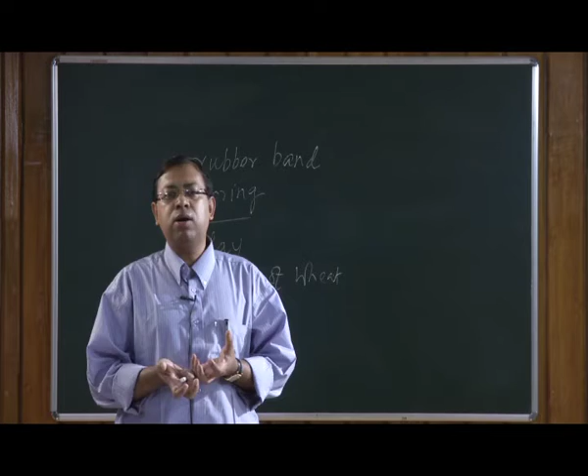So, what actually goes on inside the material for which some of these materials actually regain their original shape and some of them do not? To understand that, let us understand the intrinsic building block of these materials. And by building block, what we mean are the atoms and the molecules and the way they are bound to each other.

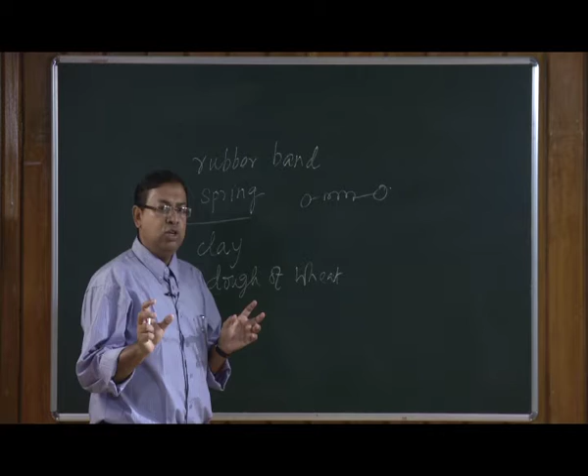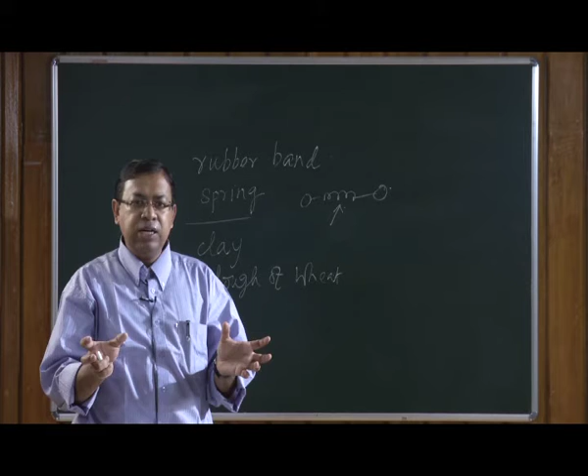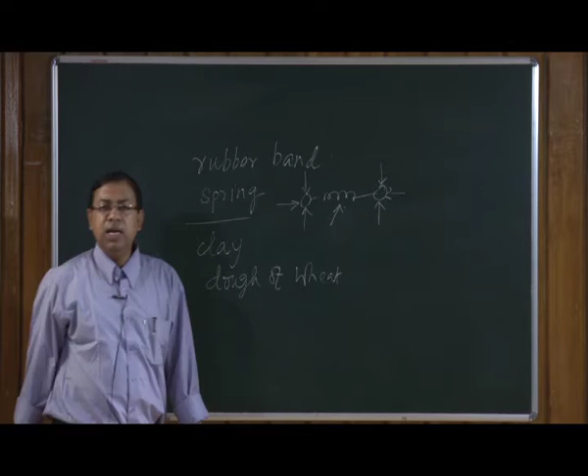It will be very preliminary to say that we could think of these elastic materials to be made of springs, where the two balls at the end that you see actually represent maybe atoms or molecules, and the spring-like thing that I have drawn here are the connections between them, and when a pressure is exerted on these materials either this way or even these ways, they tend to regain their original configuration.

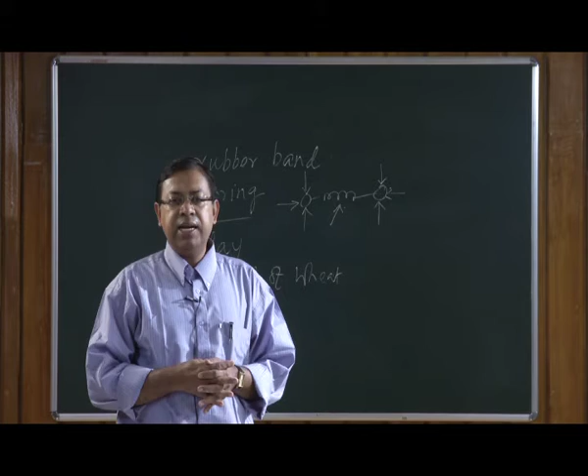So, having understood the atomic configurations which really render these elastic properties, let us try to understand the relationship between the forces and the elongations. There are terms such as tensile stress and tensile strength that we will come to very soon, and what are the interrelationships between them, and how do we actually quantify some relations by which elasticity can be understood better.

So, let us take an example of two rods, and consider three different cases. In the first, they have same initial length but different extension. And to make matters even clearer, let us call L0 the initial length, delta L the extension.

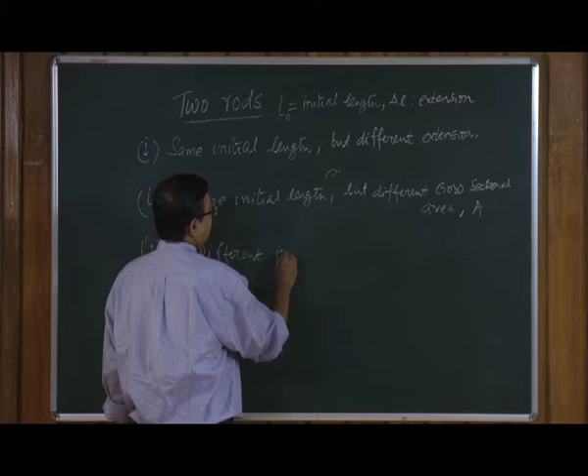So, case number 2, where we have same initial length, which is L0, but different cross sectional area. And in the third case, we have different initial length but same extension.

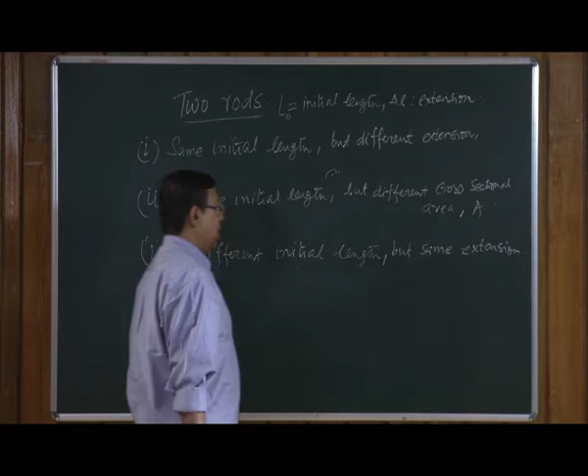Now, if I cause an extension and apply a larger force F1 here and a smaller force F2 here, I will have more extension in this rod than in this rod. Okay? So, where my F1 is greater than F2. So, this is case 1.

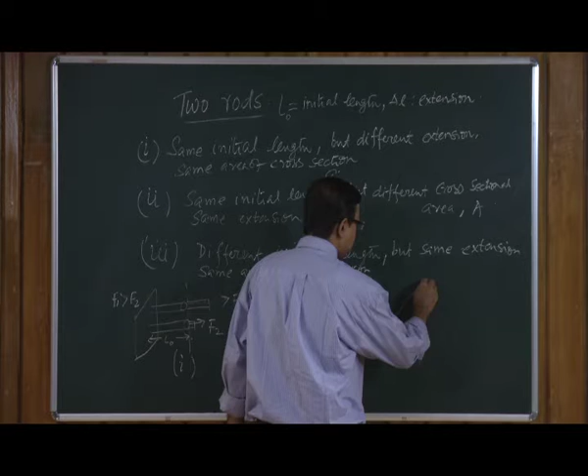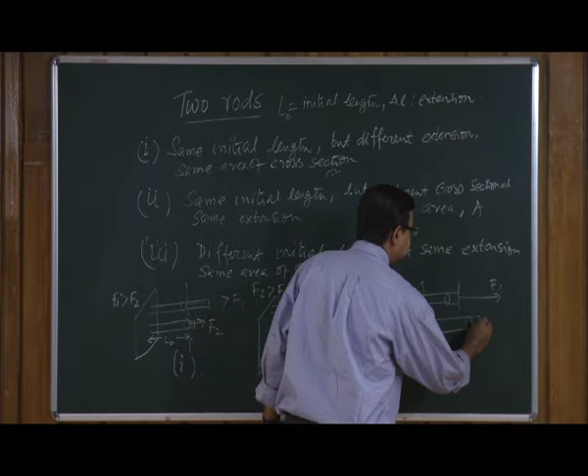Going to the third case, we have different initial lengths. Now, to have same extension, I need a bigger force in the rod with smaller length than for the rod with bigger length. So, this is your L01 and this is your L02. So, my F1 is greater than F2.

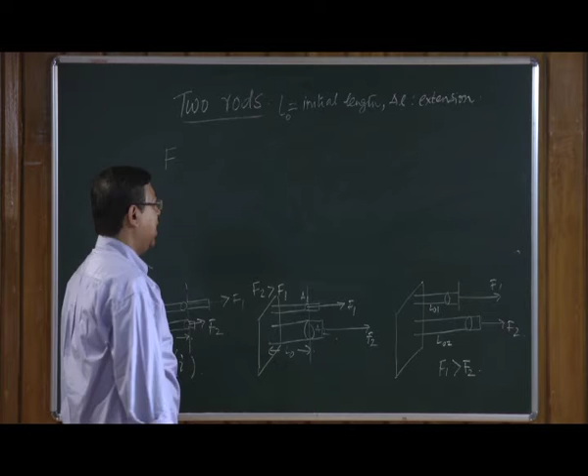So, from these three figures, it is apparent that the force required to create an extension delta L in a rod of initial length L0 and cross sectional area A: F is proportional to delta L, F is proportional to 1 over L0, and F is proportional to the area of cross section. So, if we combine all three of them, we can write that F is proportional to delta L, 1 over L0, and A.

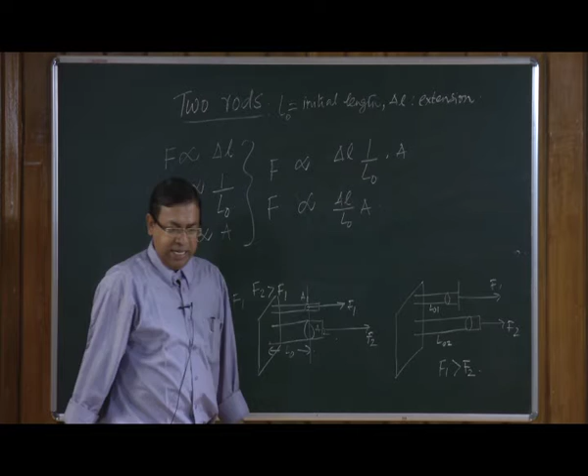So, I can write it a little more compactly, and so my F is proportional to delta L over L0 multiplied by the area of cross section. Now, delta L by L0 can be called the fractional change in length. Let us write delta L by L0 as the fractional change in length.

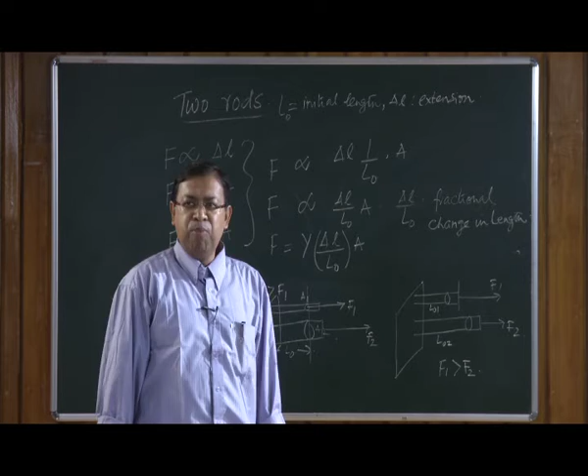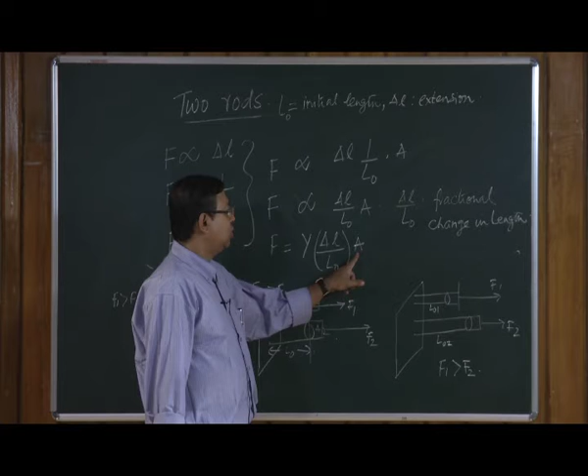And hence, I can change this proportionality using a proportionality constant, Y, so F is equal to Y times delta L by L0 into A. This is a very important equation in the study of the elastic properties of solids, which says that the force required to create an extension delta L for a material of length L0 and cross sectional area A is written as this, where Y is known as Young's modulus.

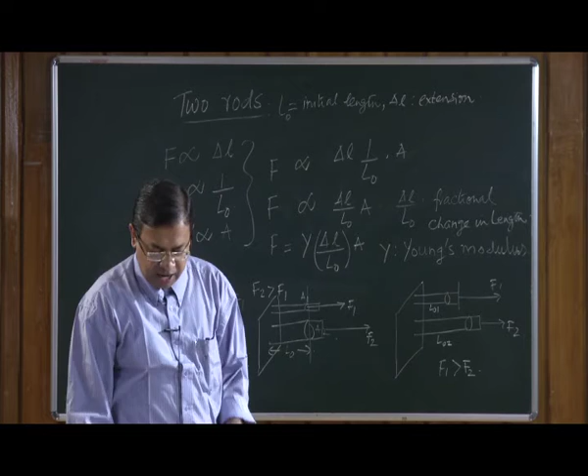This Young's modulus is named after Thomas Young, 1773 to 1829. And this formula, or some variant of it, will be revisited a number of times in our discussion of elastic properties of solids. So, to make this ongoing discussion more understandable, let us take the example of a spring.

If we double the force, the extension will be doubled, which means that the extension delta L is proportional to the force applied on the spring. If we triple the force, the extension is going to be tripled.

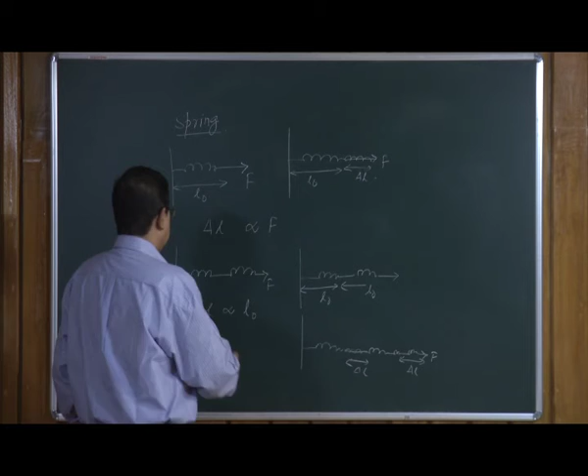So, which means that your delta L, the extension, is proportional to the original length L0. So, as we double the length of the spring under the application of the same force, the extension or the elongation becomes twice as much. So, delta L is proportional to L0, and we have also got delta L is proportional to F.

Now, to get the third dependence, that is the dependence on the area of cross section, we need to talk about a wire. So, let us take a wire of a finite cross section, and now take an identical wire of an identical cross section and length, and suppose you apply a force here. This is equivalent to the fact that there is a larger area of cross section, same length, and is acted upon by a force F.

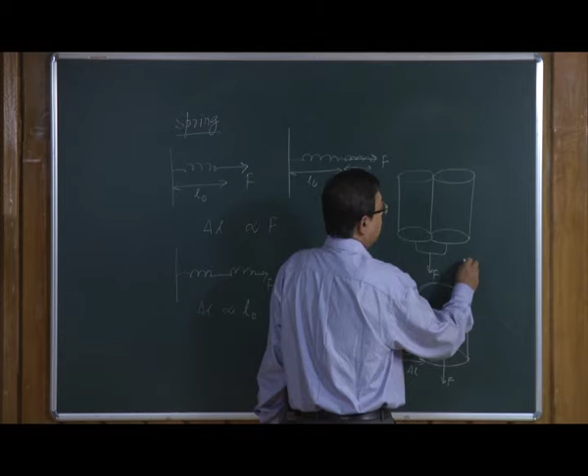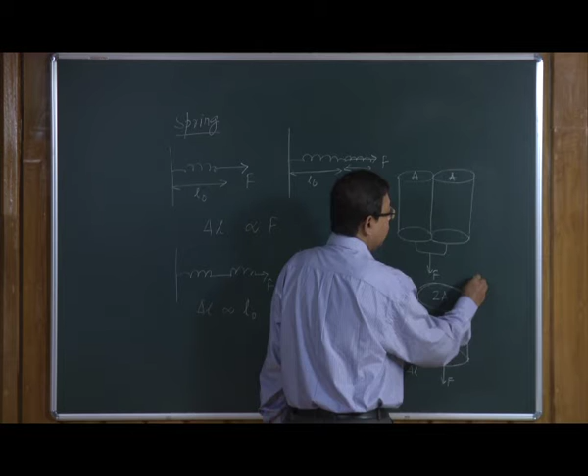So, this has an area of cross section A, this has an area of cross section A, this has an area of cross section 2A. So, under the application of this force F, the extension will be delta L by 2, which means as we double the area of cross section, the elongation goes down by a factor of 2.

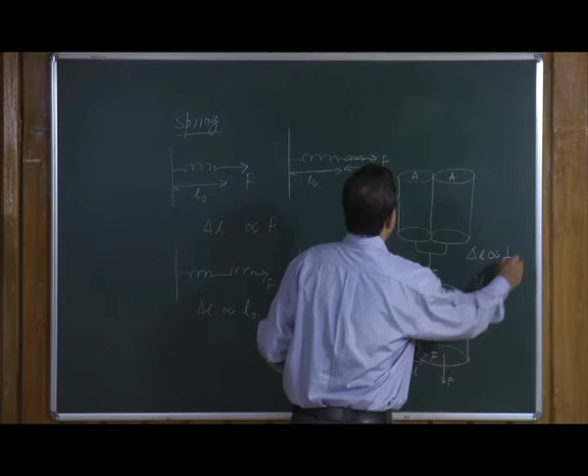Similarly, if you take 3 such wires, put them together and apply a force F, and then consider an equivalent wire with an area of cross section 3A, then the extension is going to be delta L by 3, which tells that delta L is inversely proportional to A, and hence all these 3 relations put together, we can claim that

delta L is proportional to F, is proportional to L0, is inversely proportional to A, and as said earlier, the proportionality constant is called the Young's modulus, and we can write down this very familiar form, which is Y equal to F by A over delta L by L0.

So, with the help of this spring, we can understand the dependencies of this elongation on the force, the unstretched length L0 and the area of cross section of the wire, and we can again rederive this same formula that we have derived earlier. Y is called the Young's modulus.

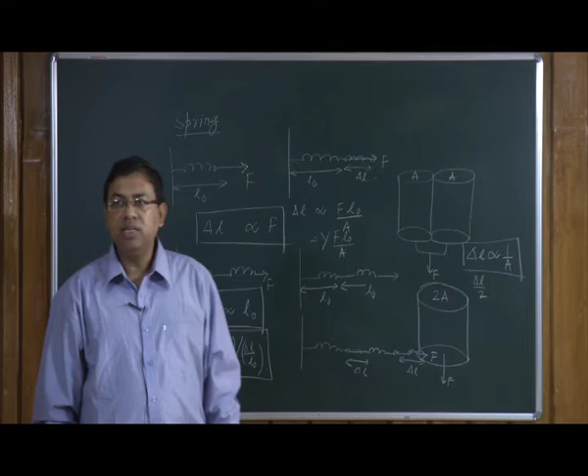So, let us just come to this discussion of tensile stress that we had briefly spoken about, but haven't elaborated on. If I simply divide both sides by A, the area of cross section of the material, the rod in our case, then Y can simply be written as F over A divided by delta L over L0, and as we have said, Y is called the Young's modulus.

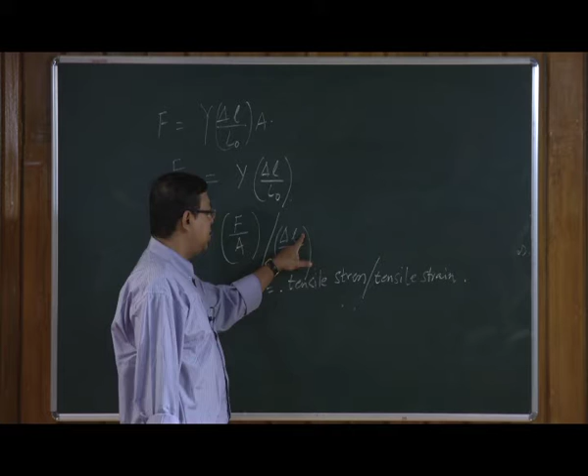So, the Young's modulus is defined as the tensile stress divided by the tensile strain. The tensile stress is defined as the force per unit area that is given to the rod of cross sectional area A, and delta L by L0 is a fractional change in length that has occurred because of this tensile stress, and Y simply appears as the ratio of the tensile stress and tensile strain.

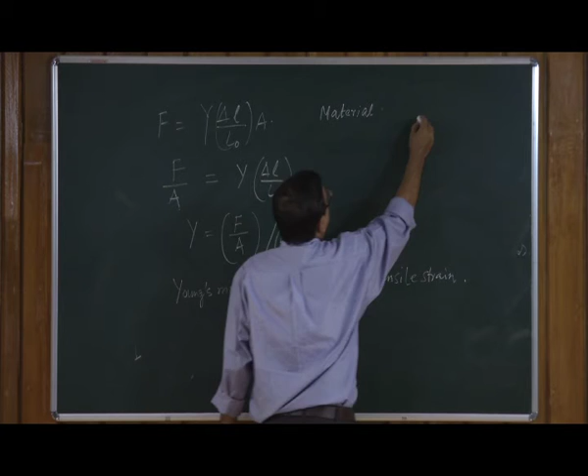And so, we may want to know what the values of this Young's modulus are for most materials. For solids it is very high. To quote a few representative values, we can prepare a table, which you will get in your book, of the value of Y.

So, for materials such as aluminum, this is 6.9 into 10 to the power 10. And just to point out what could be the dimension of this: F over A is Newton per meter square in SI unit, whereas delta L by L0 is dimensionless. So, this will simply have the dimension of the tensile stress, which is simply Newton per meter square.

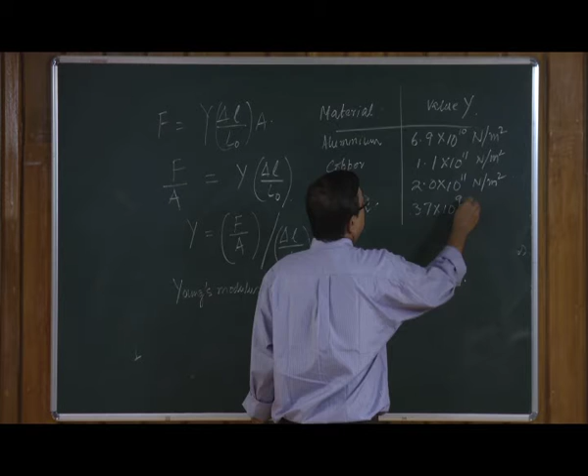And for copper, it is slightly over 10 to the power 11 Newton per meter square. Similarly, for steel, which is known to be quite strong, this has a value of 2 into 10 to the power 11 Newton per meter square, whereas nylon, which is known to be elastic, is 3.7 into 10 to the power 9, which is less than any of the other metallic items quoted here, and brass has something intermediate, which is 9 into 10 to the power 9 Newton per meter square.

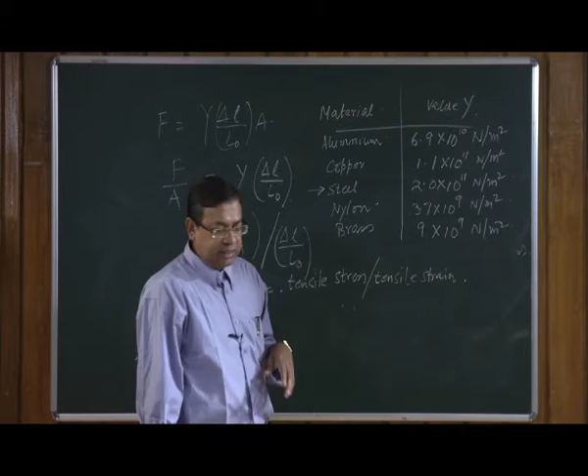So, this shows an interesting fact that steel, which among these has the maximum value for the Young's modulus, 2 into 10 to the power 11 Newton per meter square, simply tells us that the force required, or the tensile stress required to create the same elongation, is maximum in steel as compared to any of the other materials presented here.

So, let us take a very practical example of where we get this stress and its relevance in our daily life. Let us consider a circus act in which a particular performer supports the weights of 6 co-performers in the group, each weighing 50 kgs, and consider g to be equal to 10 meter per second square, which is often approximated because 9.8 is a slightly odd number to calculate with.

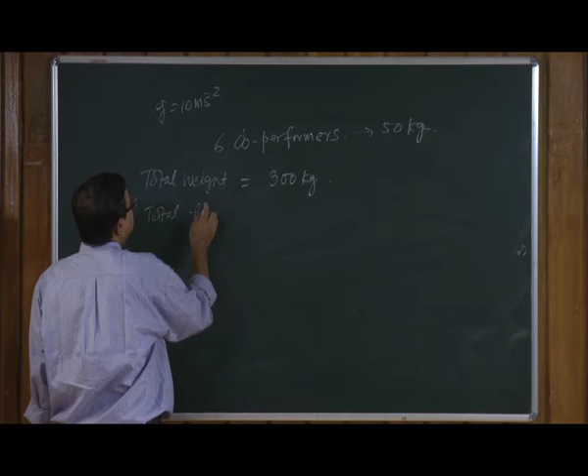So, the total weight of all those 6 performers put together is 300 kgs. With g equal to 10, the total force this performer will support is 300 into 10, which is equal to 3000 newtons. Now, this performer has his femur bone, the bone in his legs, approximately 0.5 meter long, and its cross sectional area is 10 to the power minus 3 meter square.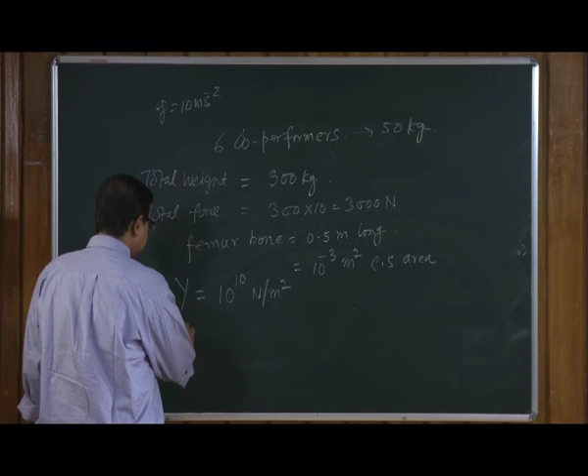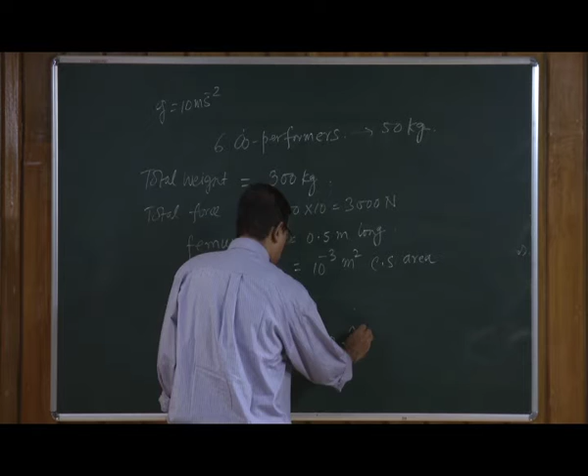We want to know how much compression in his femur bones is caused by supporting 6 performers on top of him. Consider the Young's modulus of the bone is approximately 10 to the power 10 Newton per meter square. Because he has 2 legs, the force is 3000 divided by 2, times 0.5 meters, divided by 10 to the power 10 Newton per meter square times 10 to the power minus 3 meter square, and this will give us approximately 10 to the power minus 6 meter.

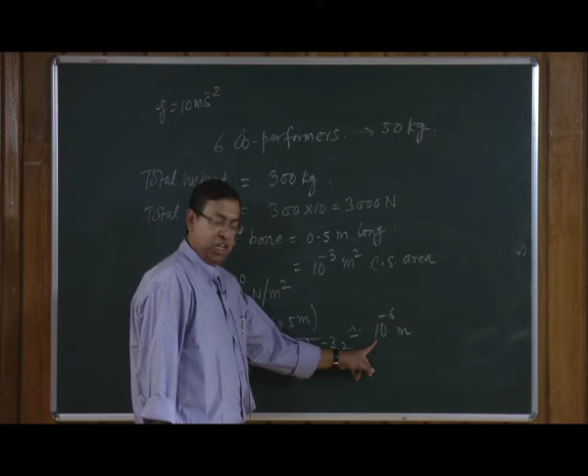So, for supporting the weight of 6 performers, the compression in his femur bone is of the order of 10 to the power minus 6 meters, which is 1 micrometer, fairly small. Now, let us take the same example, not with the bones of a human being, but with a steel wire. For our convenience, let us call the unstretched length simply L, which is equal to 1 meter.

Take that to be a thin wire, say the area of cross section to be 10 to the power minus 5 meters square, is subjected to a weight which is equal to, say for example, 500 kg. Do we really want 500 kg? Yes, maybe we want 500 kg. So, the force acting on the wire, so this mass is hung from a steel wire whose unstretched length L is equal to 1 meter. The area of cross section is 10 to the power minus 5 meters square, and there is a weight which is M is equal to 500 kg.

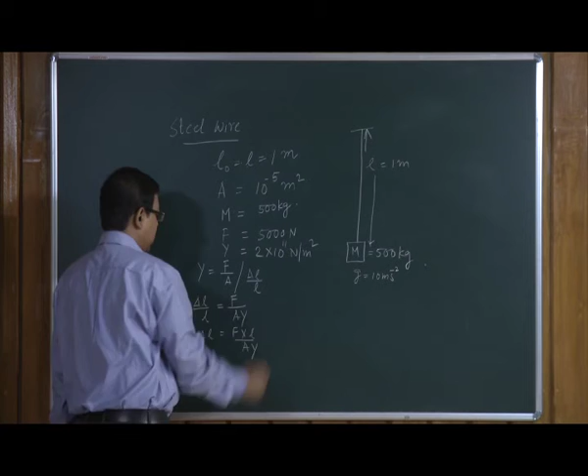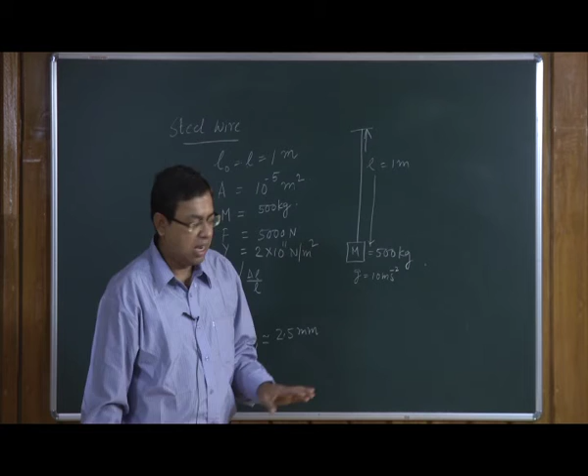All the other quantities are given, and for a steel wire, Y is equal to 2 into 10 to the power 11 Newton per meter square, and one can easily find out that this is equal to 2.5 millimeter. 2.5 millimeter of extension is actually detectable by the naked eye, and so you can see this extension of the rod. Now, we understand why in this particular example we have taken a mass which is as large as 500 kg.

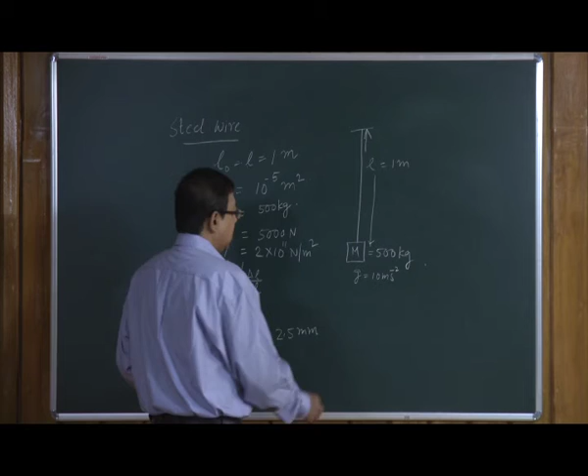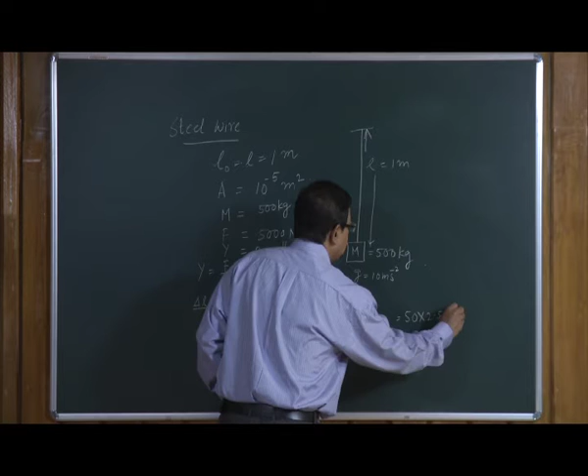Now, just to let you know that if it is a nylon wire, nylon has a Young's modulus which is approximately 50 times lower than the value of steel, which means the extension for a nylon wire is going to be 50 times more than 2.5 millimeter. So, this is a large extension which of course can be recorded. So, this distinguishes different materials undergoing different extensions under the application of a given force.

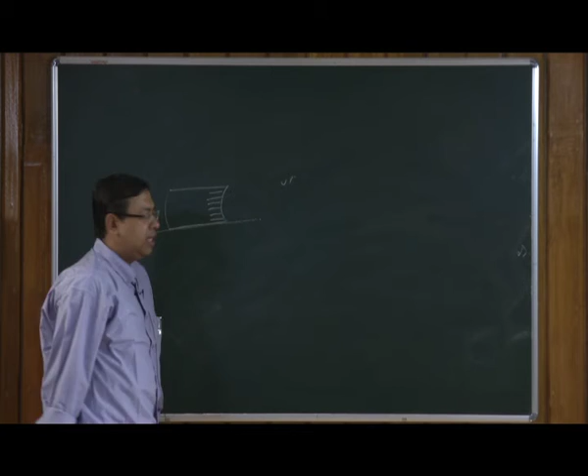So long we have talked about either compression of an object or extension of an object along one dimension or along one direction, so to say. Now, we can consider a different kind of deformation of an object, which is other than this simple extension or compression. So, for that, let us take this example of a thick book. So, this is a side view of a book which is kept on a rough table, and if we want to consider that,

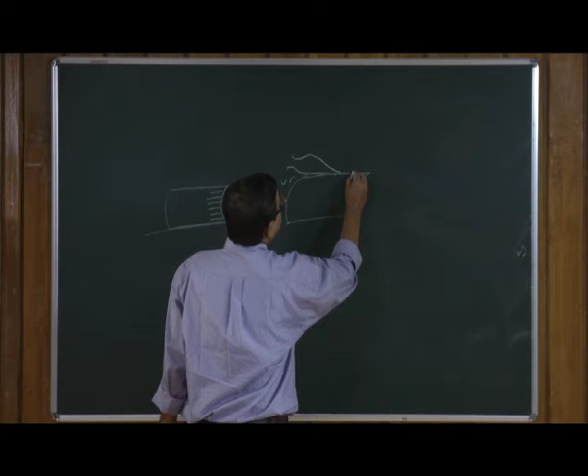if we apply a force on the top of the book which has an area of cross section A, so we apply a force on the top surface of the book which has an area of cross section A. There is a force that acts in the opposite direction which is of the same magnitude, and let us denote it by a negative sign, and this will cause an extension, let us call it delta x here, and this is the original length L0.

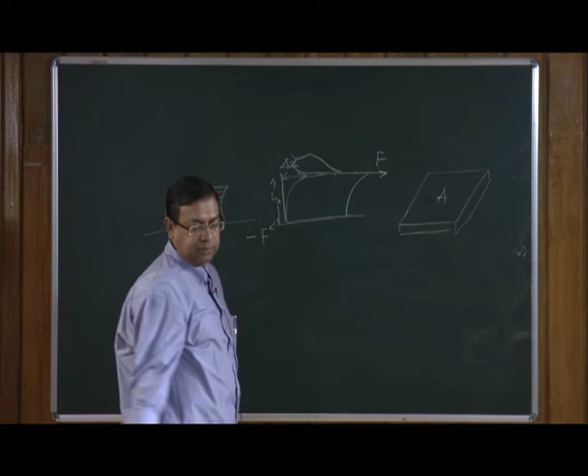So, this resulting deformation of the book from its initial configuration as shown here is called the shear, and this force per unit area is called shearing stress. As you see in this picture, there is a shearing stress being developed between two parts of the cube. They are sliding against each other. So, there is a shearing stress that is developed between the two parts.

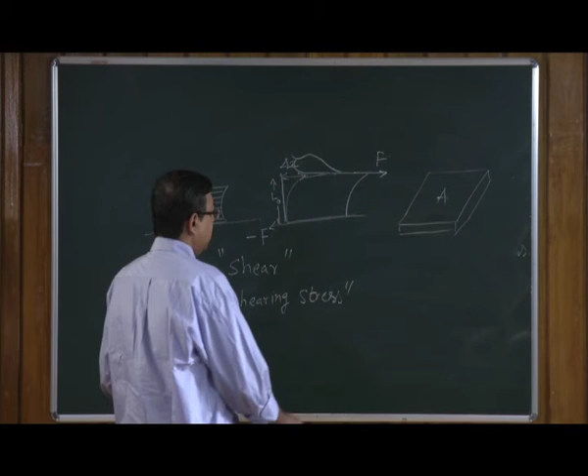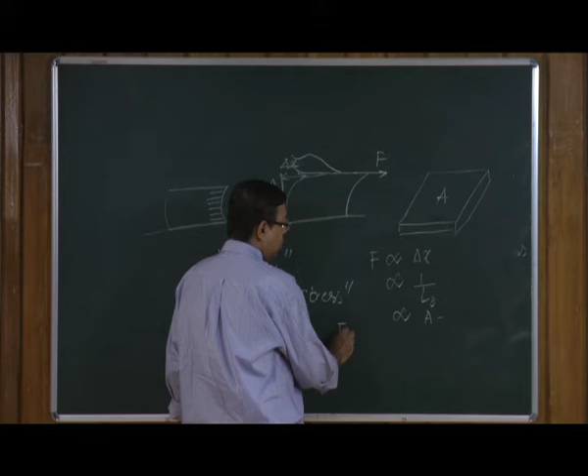Okay. And a similar line of arguments will show that F will still be proportional to delta x, where delta x is indicated by this extension, is inversely proportional to the original length here, and it is also proportional to the area. So, combining just like before, we can write it as delta x by L0 into A, and similarly we can write that F over A is equal to G into delta x by L0.

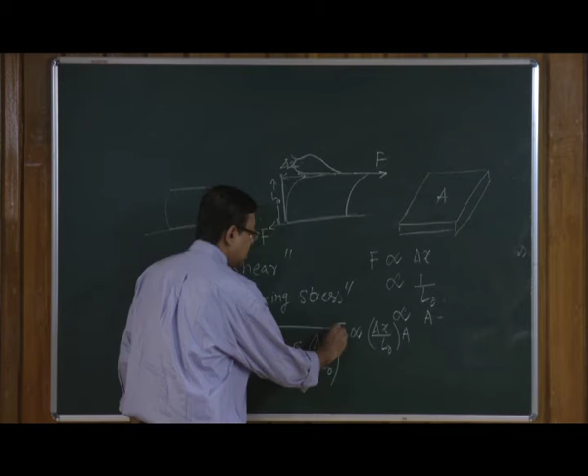Just like the Young's modulus, G will be called the shear modulus, and F over A as we said will be called the shearing stress, and delta x over L0 is called the shearing strain. We can understand this shearing strain in a better manner if we draw a cylinder. So, this is my cylinder, this is my extension, and there is a force which is acting this way, and an equal force is acting in the other direction, and this length is L.

So, the shearing strain is given by delta x over L, or let us just put it as L naught as we have been doing, and this is given by tan of the angle of the deformation.

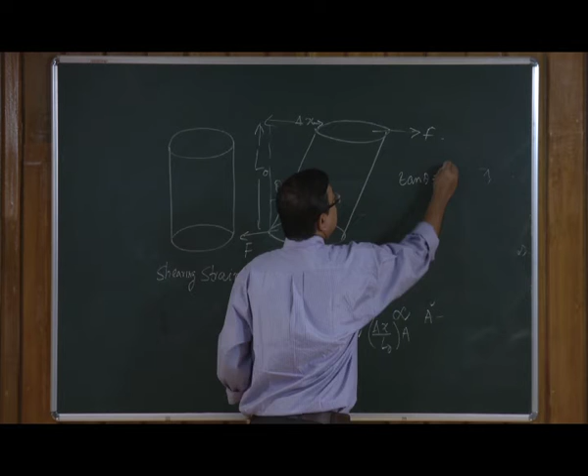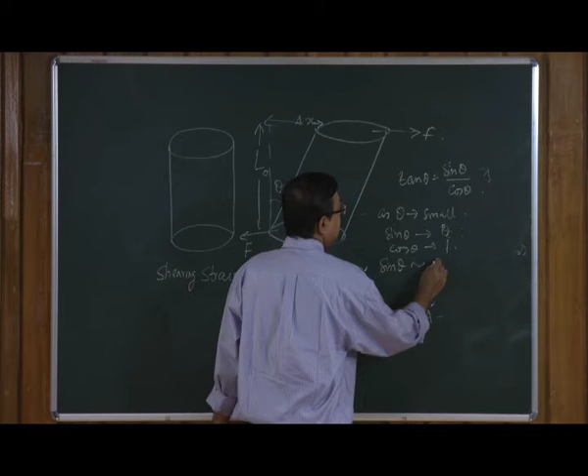Okay. And for this theta to be small, we can approximate tan theta as sin theta, because just to point out that tan theta equals sin theta over cosine theta. So, as theta is small, sin theta will increase linearly as theta, whereas cosine theta will become equal to 1. So, tan theta becomes equal to sin theta, which becomes equal to, I am so sorry, this theta, and sin theta will be written as theta.

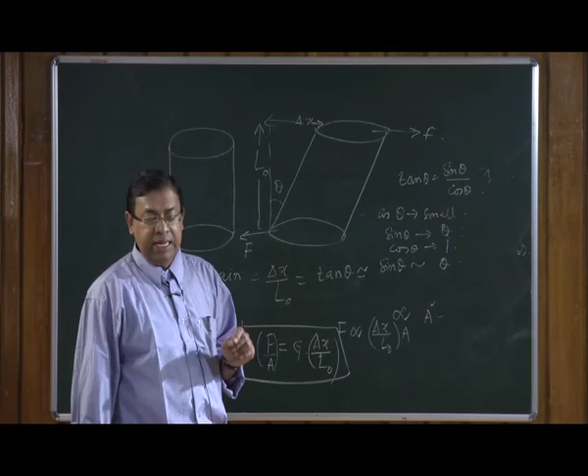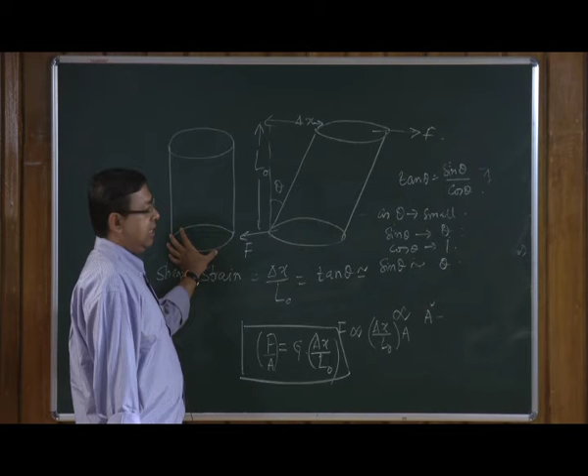So, these are the shearing stress and the shearing strain relation, and this is very similar not only in the looks, but also in form, excepting that you have not caused any extension or compression, but have simply applied a shearing force, because of which this upright cylinder has become a cylinder which is inclined at an angle theta. So, the next thing that we are going to talk about is volume deformation.

This is to say that it is not only in length or in area, we can also create a deformation to a particular object in all three possible directions, by applying stress or applying a force which acts uniformly in all directions. A familiar example of this can be given for a body submerged in a liquid.

So, this is a liquid, and let us take a body, just a cube in our case, and the forces acting are from all sides, and this will definitely create a compression in the system. And since the force is acting perpendicular to this, we can replace the force by the area, which is by the pressure due to the liquid.

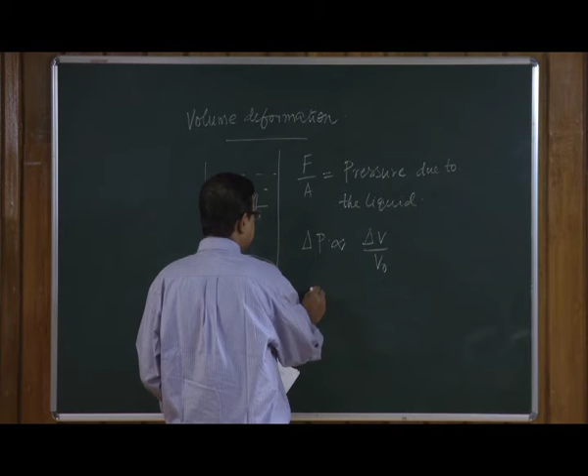So, that tells you that in this particular case, it will cause a deformation to the body, where this pressure, let us call it a change in pressure compared to the original pressure, should be proportional to delta V over V 0, and hence this delta P, which is again the volume stress, can be written as B into delta V by V 0, where B is called the bulk modulus.

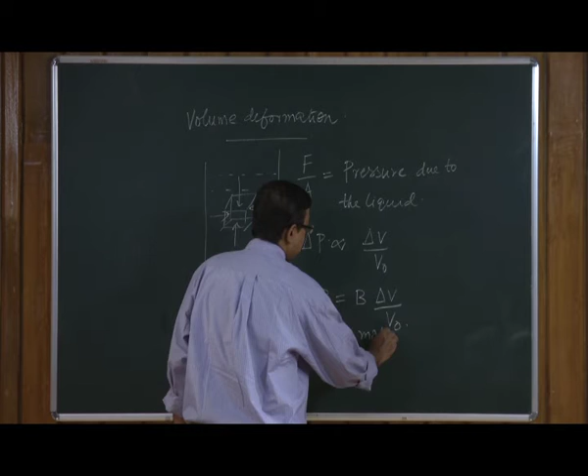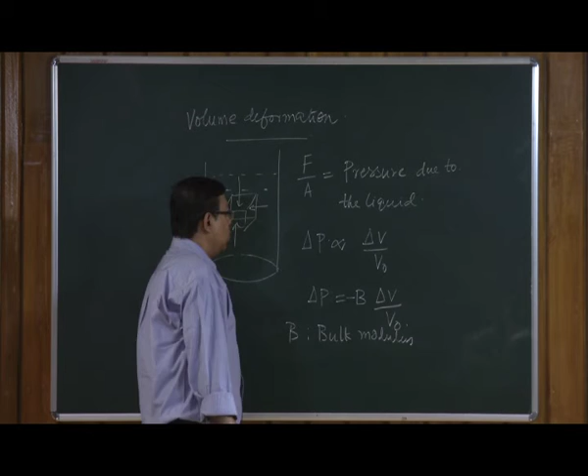Of the system. And we have to put a negative sign here in accordance with the fact that as pressure increases, volume decreases. So, as you submerge this body deeper and deeper into the liquid, there will be increased pressure, and that will cause the volume to compress more, and this is what underwater divers experience in their journey deep into the sea.

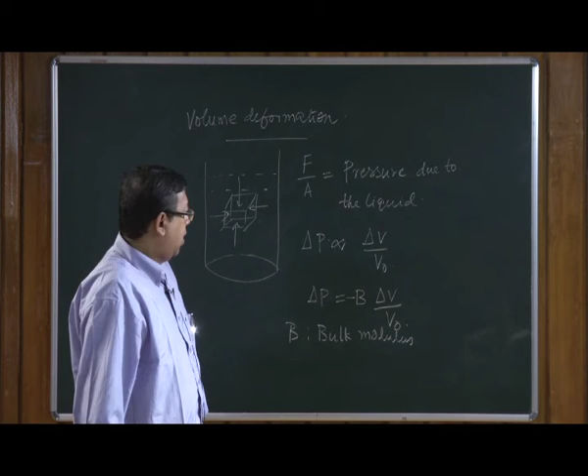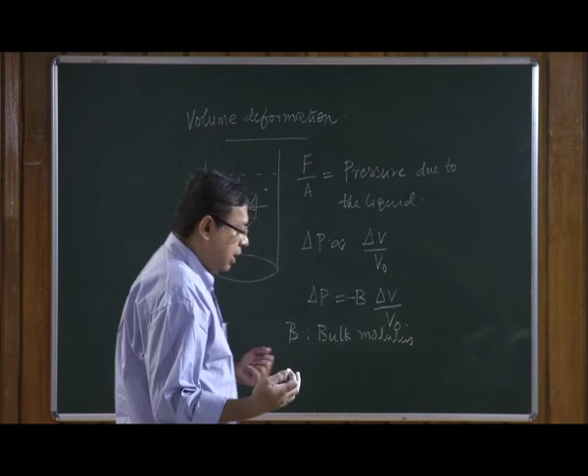And so, we have understood now there are three constants which adequately describe the mechanical properties of the body, which are Y as Young's modulus, G as shear modulus, and B as bulk modulus.

So now we are going to look at Hooke's law. This is named after Robert Hooke, from 1635 to 1703.

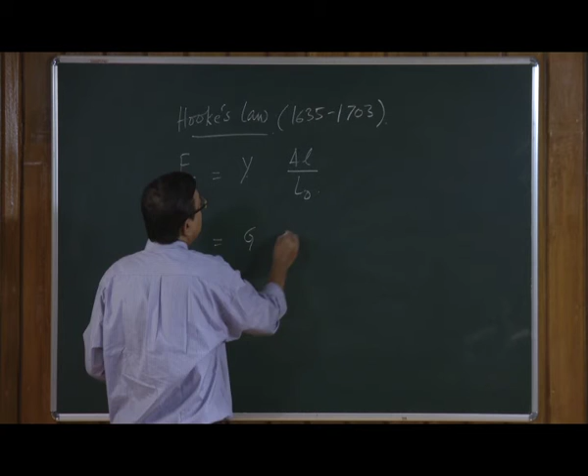So this is summarizing the findings that we have so far, and we can write for the first case of tensile stress and tensile strain, we had delta L over L0 connecting to F over A, and similarly the F over A is connected to delta X over L0, and finally this delta P, which is connected to the bulk modulus by delta V, and just in accordance with this L0 we will write a V0, which represents the original volume of the system.

Now, as you can see, on the left hand side all these are stresses, and on the right hand side all these are strains. So there is a stress and this is strain, and in each one of them the stress is actually proportional to the strain, where the proportionality constants Y, G and B are called Young's modulus, shear modulus and the bulk modulus, which depend upon the properties of the material.

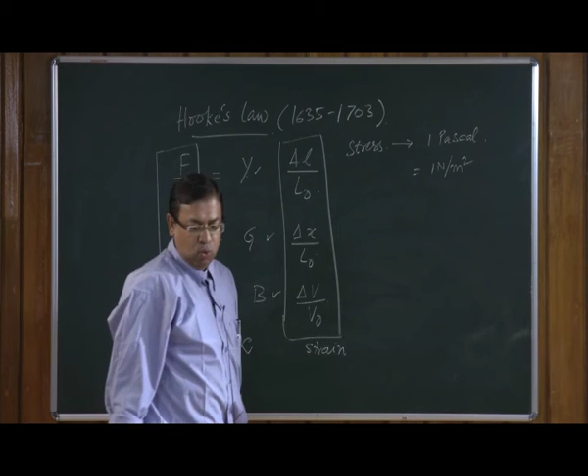And this fact that stress is proportional to strain is known as Hooke's law. So just to revise that, stress has the unit of Pascal, which is equal to 1 Newton per meter square. So 1 Pascal equals 1 Newton per meter square, and strain is of course dimensionless.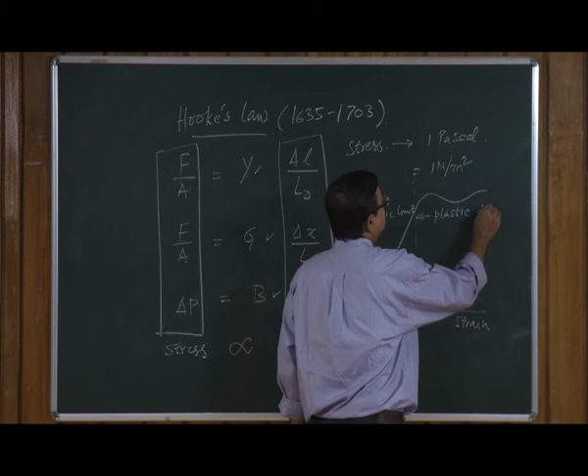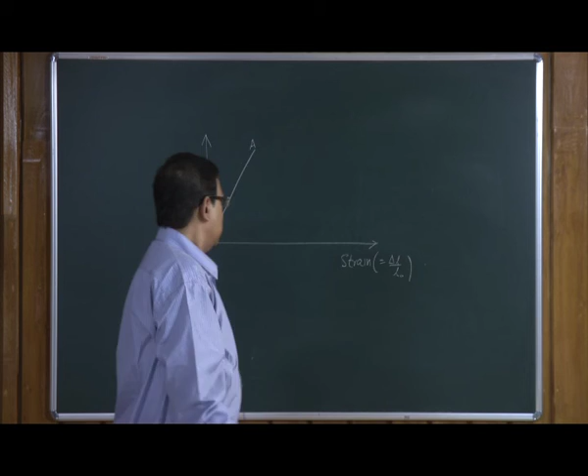The stress strain graph that we have talked about needs a closer look. If you look at the stress versus strain relationship, let us draw that again. Stress, which has the unit of pressure, which is like F over A, whereas strain is dimensionless, and this behaves like this initially, which is a straight line, which means that stress is proportional to strain, and in this regime all the way from point O to point A, Hooke's law is valid. So, stress is proportional to strain, and we know that the proportionality constant is called the Young's modulus.

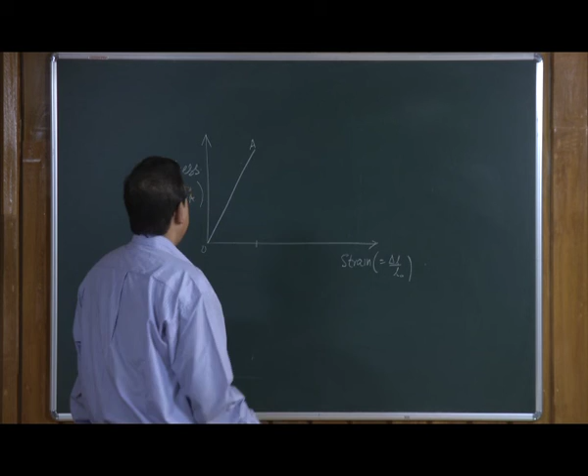Once you surpass this point A, which means the strain becomes larger than the value that is here, and you keep applying the stress via the weight or via the mass that was discussed earlier, this graph no longer remains a straight line as before, and it becomes like this. Let's discuss this region now.

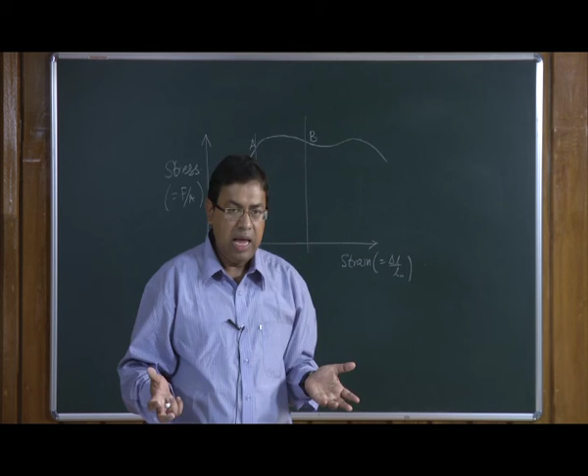It is not a straight line, but it's fairly flat here between A and B, which tells you that for a small increase in stress, the increase in strain is enormous. In other words, in this particular region, the material has a plastic flow. So, it almost behaves like a fluid, and it flows and it reaches a point B.

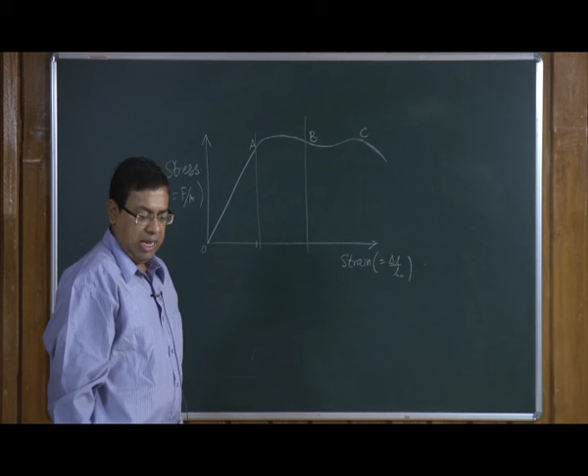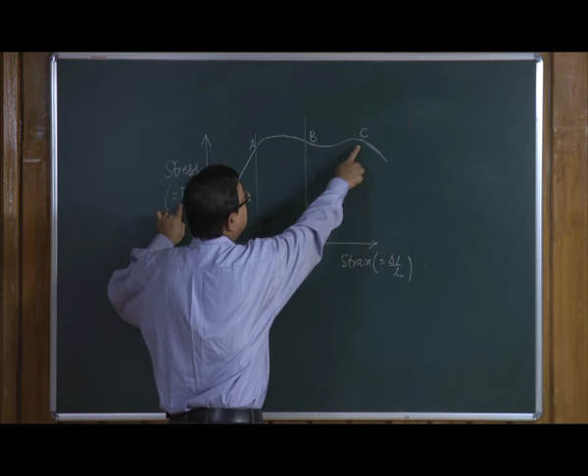So, this region from B to C is quite interesting. It is interesting in the sense that there is a non-monotonicity at this point B. What I mean by non-monotonicity is that in this region, even though the stress is decreasing, the strain is increasing, which has not been the case so far. So, in particular circumstances, the stress could actually decrease, however, the strain will continue increasing.

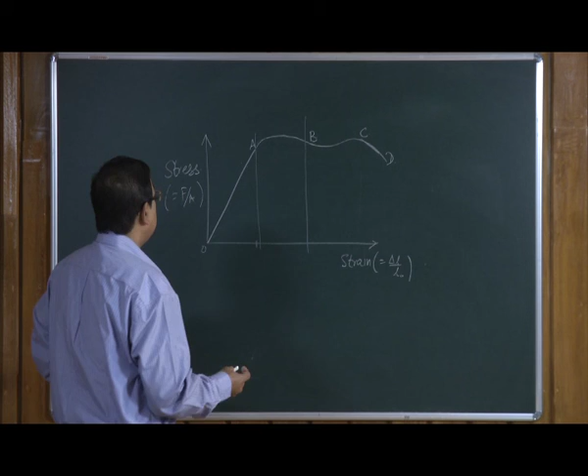There are specialized equipments where this kind of behavior can be detected, and this detection can only happen close to the breaking point, and this D is called the breaking point where the material breaks. So, this part between O and A is of importance to us, because this is where our discussions are mostly concentrated, because this is called the elastic limit, where Hooke's law is strictly valid, and beyond that Hooke's law begins to fail.

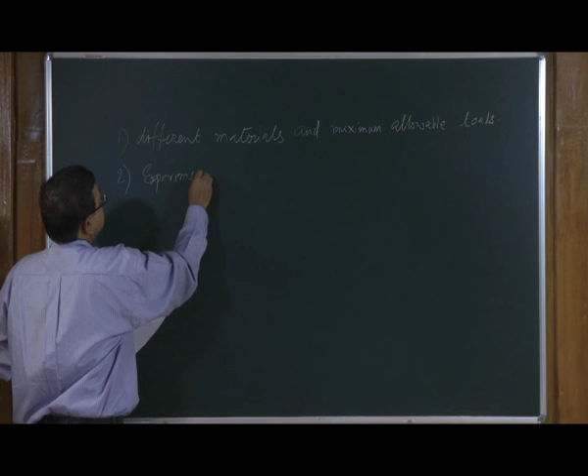So, before we end this class, let us take a look at what's going to be done in the next couple of classes. We'll take a look at different materials and maximum allowable loads, so that when construction takes place, we know exactly how much load to put, such as the tensile stresses or the compressive stresses. These have to be known for different materials, especially the ones used in construction. Then we will take a look at experimental determination of Young's modulus.

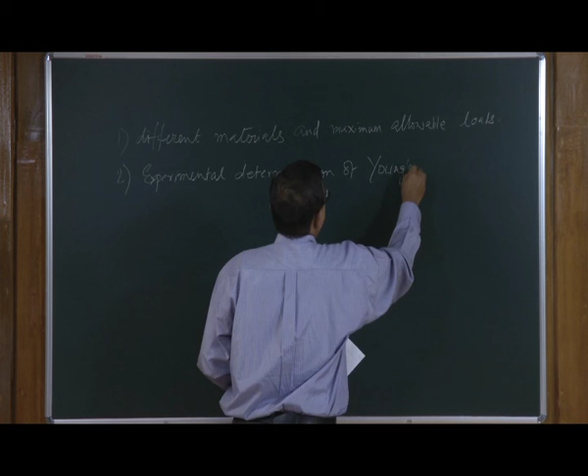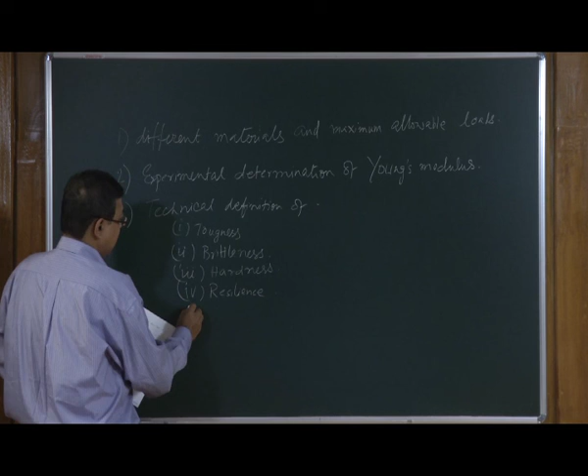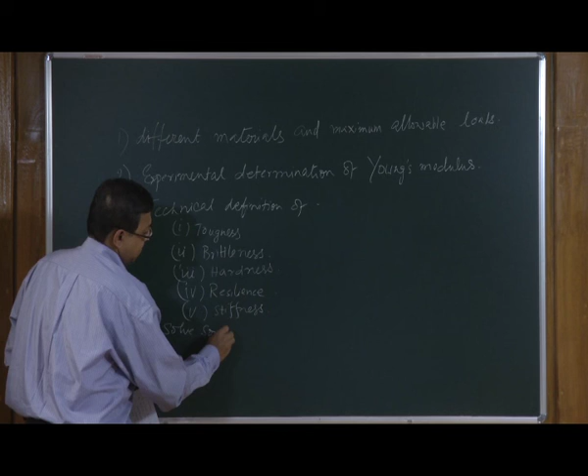Third, we will take a look at the technical definitions of certain terms which are used very often to discuss the elastic properties of matter, quantities such as toughness, brittleness, hardness, resilience, and stiffness. And finally, we will solve some problems. These are the plans for the next class.